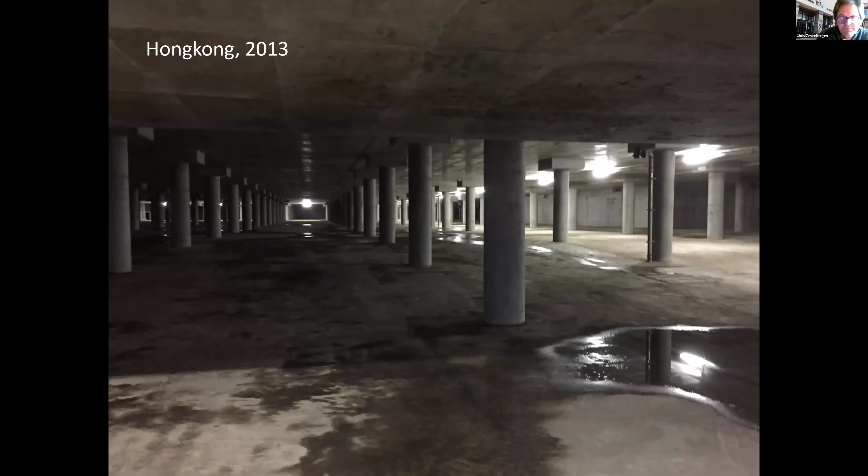In Hong Kong, there are currently large underground water storage systems, as you see here. And on top of those big cellars, you have green areas, parks, and so on. So there's a multifunctional use of space. And these systems are being built currently in many places across Asia.

Another example of how we are dealing with increasing and changing climate is a locally led adaptation program, and we call this tile lifting. It's an initiative which started in one city where the dwellers, the citizens, are being encouraged to remove the tiles in their street, of course in a controlled way.

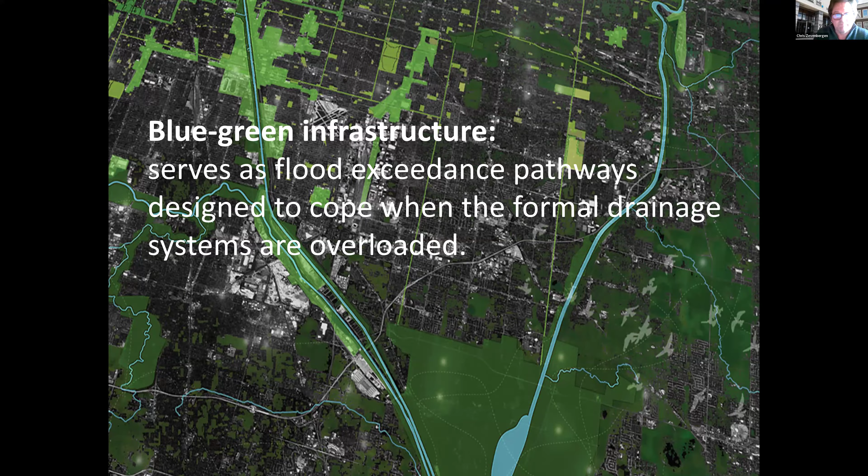It has water bodies around its perimeter, and those water bodies serve on one hand to accommodate severe rainstorms, but also to provide cooling and to provide fresh water in the dry times. So this city has a very, I would say, appealing and integrative view on resilience and water sensitivity.

What we see more and more is that the city alone cannot handle extreme rainstorms, and that cities have to look beyond their borders, have to reach out to the province and even the national level to really align the strategies. And in many cases, floodplains upstream of cities are being considered vital. The management of those floodplains is vital to manage extreme flood events.

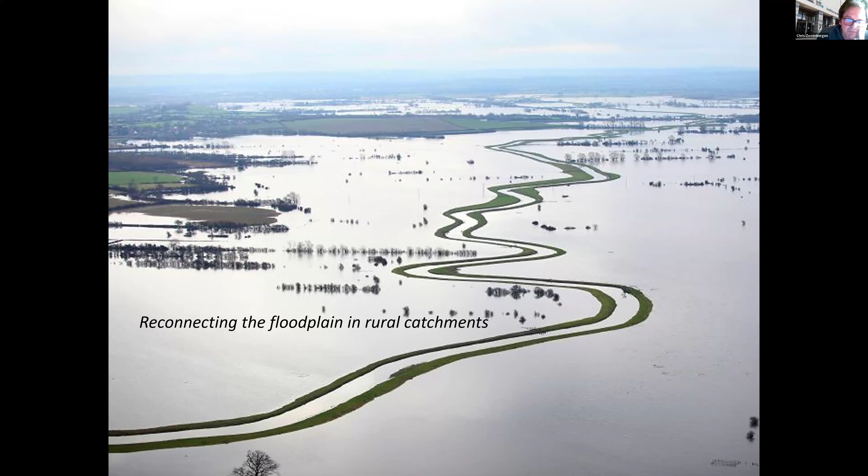There are, of course, lessons to be learned. And if we look from a historical perspective at where we are coming from and how we are dealing with uncertainties in the probability of occurrence of storms and surges, then we started in the beginning just to react after an event, and then based on lessons learned, we were able to prepare ourselves for events.

And in the current situation, we see that our environment is changing and that we have to adapt our systems to those changes. And in particular, it is assumed that those changes are slow and that we can incrementally adjust our systems to changing conditions. So that is a bit the current situation. That is the situation of climate adaptation strategies.

But probably in the future, we need more than that. We have to anticipate trends in extreme events and slow changing drivers. We see that probably incrementally adjusting our cities to a changing environment will not be enough. We have to make what we say a transition, a transformation, because incrementally adjusting alone cannot help us to deal with extreme events in terms of droughts, extreme events in terms of rainfall.

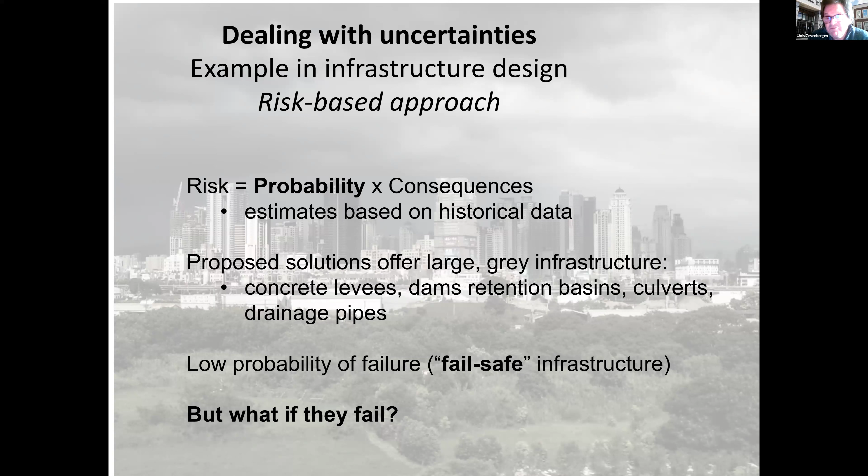And yes, the probability is based on historical data. Based on historical data, we make probability density functions, and we use those functions to make projections. That risk-based approach, we call it a fail-safe infrastructure. The design underlying the risk-based approach is, of course, that we want to have a low probability of failure. That has worked very well so far. The proposed solutions are often gray solutions, such as dams and concrete levees and culverts. But we see now increasingly that those systems can fail, and that we did not take failure into account in the design.

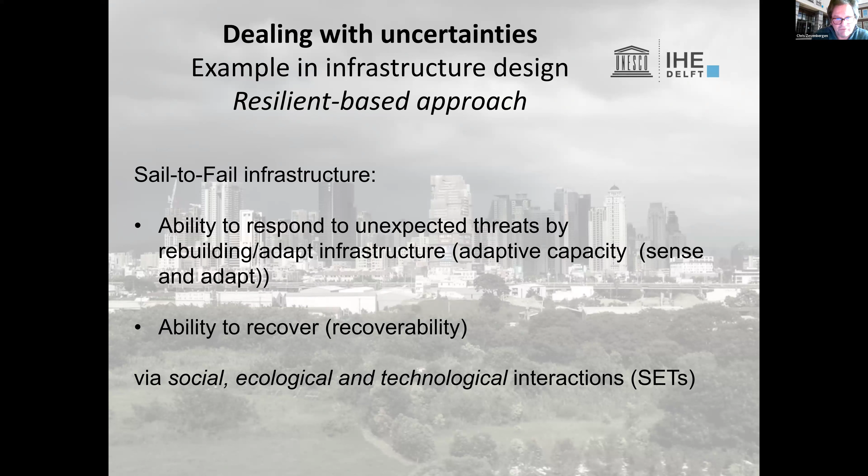A more emergent approach is what we call the resilient-based approach, where we really include failure, we design for failure, and we take into account that failure may occur in the design phase. That is called safe to fail infrastructure. Now, when we compare those two approaches, you can say the risk-based approach is focused on withstanding, providing a threshold, and the resilient-based approach is really taking into consideration that systems may fail, and that bouncing back or recovering should be part of that integrative strategy.

But a resilient-based approach is also more than that. It is also anticipating. It's also taking the temporal dimension into account and looking ahead. And I will come back to that later. But what it really comes down to is that the interventions which fit well into the resilient-based approach are green infrastructure, green hybrid blue infrastructure systems. And they are able to really accommodate those three functions I just mentioned.

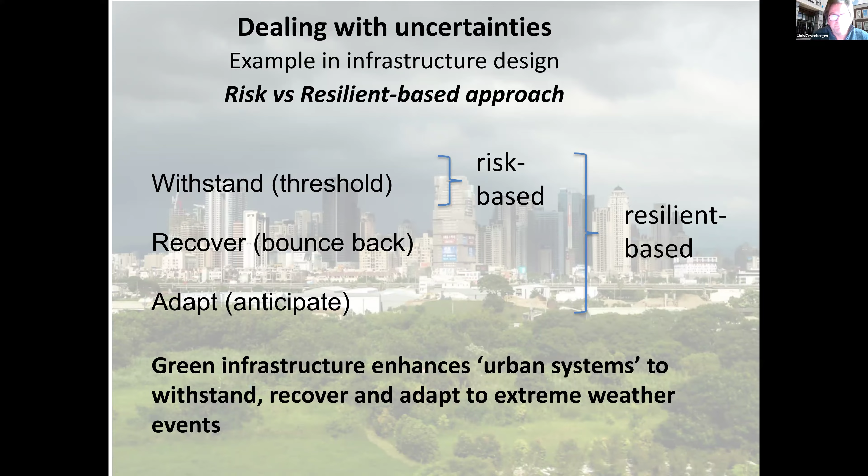Dealing with uncertainties in urban planning and water management is now really a very relevant topic. We are more and more convinced that we have to take a long-term horizon. Our old horizon was maybe one or two decades ahead, but currently we see that we have to look much further than a few decades.

One of the simple reasons is that interventions, in particular gray infrastructure, have long lead times and long lifetimes, and they can span several decades. That means that if we want to plan in a climate resilient way, we have to take that longer term planning into account. But the challenge is, of course, how should we do that?

One strategy is: let's prepare for the worst. Let's take an extreme situation into account and design for exceedance. And the question is, what is the ceiling? What should be that extreme event? Those measures are very expensive, resource intensive, and they always come along with a residual risk. So prepare for the worst is a strategy, but it also has some very serious downsides.

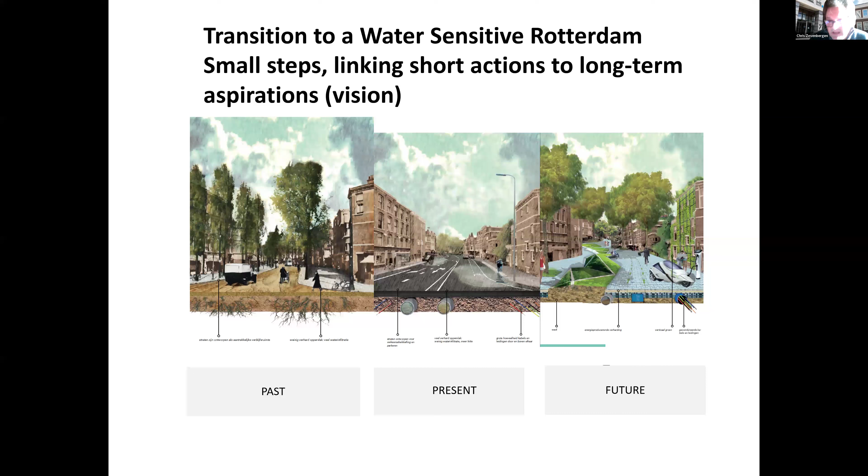So it's an opportunistic approach, and it also means that it takes at least one generation to transform the city from its current gray city to its future regenerative living city. So one of the lessons is it takes time to get there.

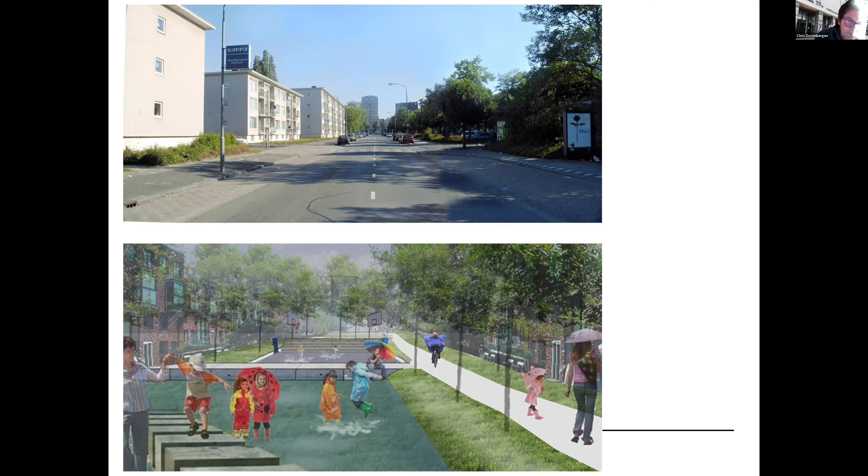They have also envisioned transitions all over the city, and this is an example of the current situation. That's the above picture, and it aims to become a city area as depicted below. So there are many appealing examples of how the city is slowly transforming into a water-sensitive city, and the moments of interventions are being determined by, say, the end of the lifetime of infrastructure or urban developments.

And what is important, the city envisions a long-term appealing future, which is, we can say, beyond the transition. If we really want to make a transition, then we cannot work incrementally from the present situation to the future. We call it forecasting, but we have to envision a future which lies far ahead beyond the transition, and then we have to look back, and via backcasting we can define the pathways to get there. So Rotterdam is really working on generating an appealing vision beyond the transition, and in this case it is 2100.

Another example which I would like to mention is Copenhagen. Copenhagen is one of the very appealing examples in Europe, and it experienced a cloudburst in 2011. There was about 150 millimeters of rainfall in 2 hours, which is really unprecedented. It was a 1 in 1,000 year rainstorm, and the city was absolutely not prepared. So the city formulated a cloudburst action plan, and it comprises 300 projects, 300 actions. And of course, those projects cannot be implemented overnight.

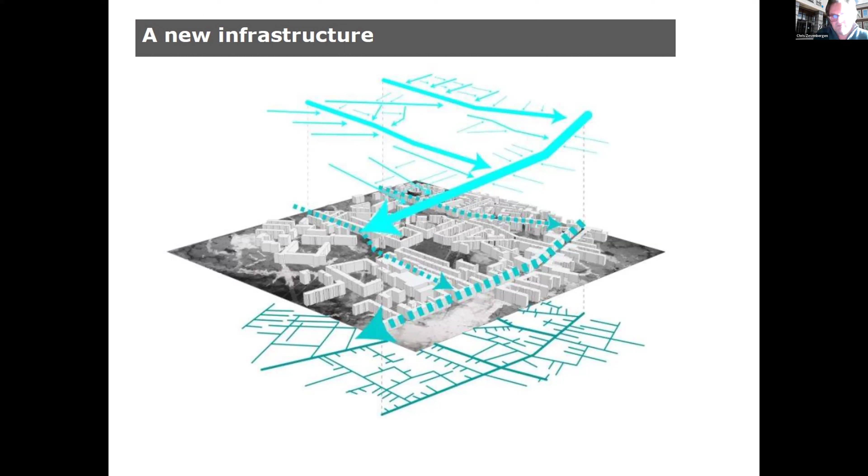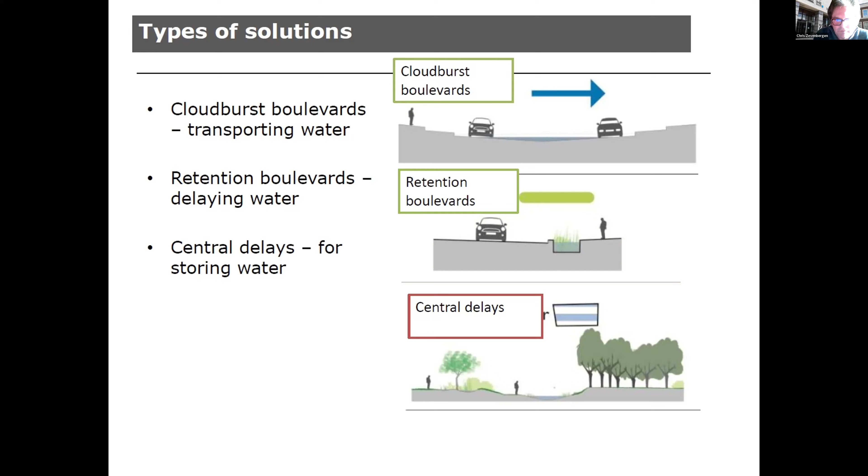So they did quite some extensive modeling. They have a good understanding of how the city is functioning, and they have designed different types of conveyance systems to transport large volumes of stormwater to places where it can do no harm. And you see here a few options. And this is an example from the city of Copenhagen.

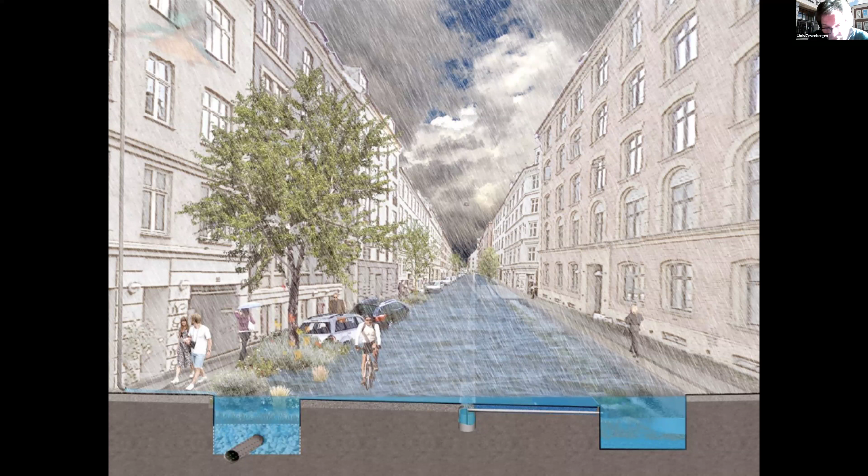Although this is a rendered image, this project is already being implemented, where you see that they have transformed the traditional impervious streets and squares into very nice green spaces. But also, this is a cross-section of a street, and those streets are already being designed and implemented, and they can serve multiple functions, and one function is a floodway when there is a cloudburst.

Now, apart from the two European examples, I would like to briefly mention what's happening in China. China is embracing the Sponge City program. There are 600 cities with more than 1 million citizens, and all those cities are really struggling with too much water during cloudbursts, not being able to deal with those large volumes, but also with serious drought problems.

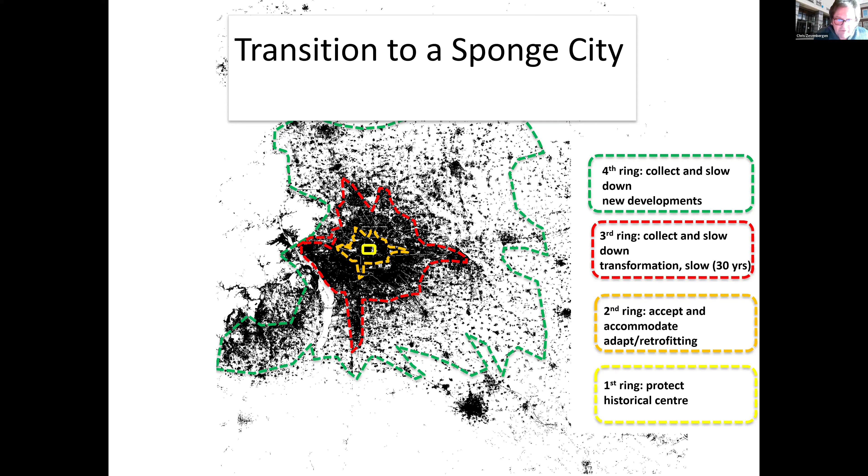So the city is embracing a Sponge City program, and it is maybe nice to see how they are really differentiating the approach according to the zone and according to, you can say, the building typologies we have there. So most cities in China, the old cities, have a historical center. They have a ring which has been developed, say, in the 80s and 90s, and there is a third ring where new developments are taking place. So let's have a look at what the strategy is for those cities.

In the ring which has been developed in the 80s and 90s, the philosophy is to try to expand the retention capacity and try to slow down and absorb rainfall as much as possible. And you see here an example on the right upper picture. You see the old situation where we have a combined sewage system where the sewage and rainwater is combined and conveyed through an underground pipe to a sewage plant. And now on a big scale, in this particular case of Kunshan, a city in China, they are opening up the infrastructure, and they are separating rainwater conveyance from the sewage, as you see with the black tubings on the left-hand side.

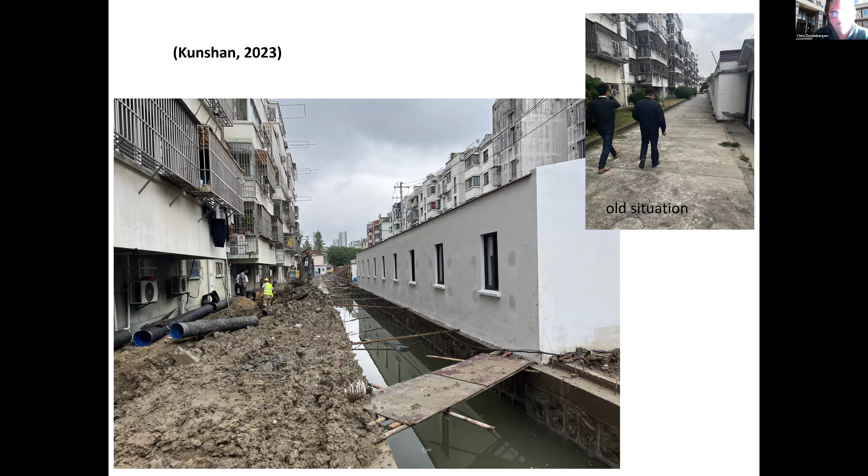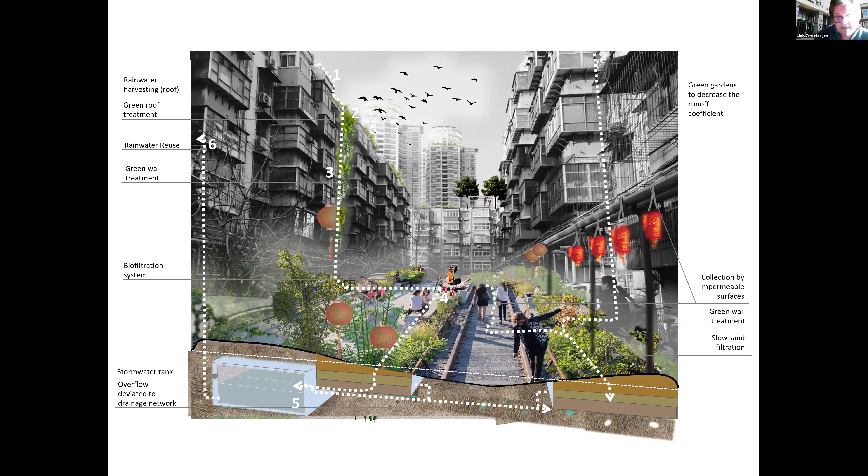So they open up the system, and they are creating very nice open water systems in the city. And this is an example where that has been done in Kunshan, where the rainwater is now being collected in those parks along city areas, and where we have at the same time a lot of opportunities for recreation. Now, this is being implemented on a massive scale, but also cities are now preparing to transform like this, and in a way we see also in Europe multifunctional use, particularly of infrastructure, to address the issues of too much and too little water.

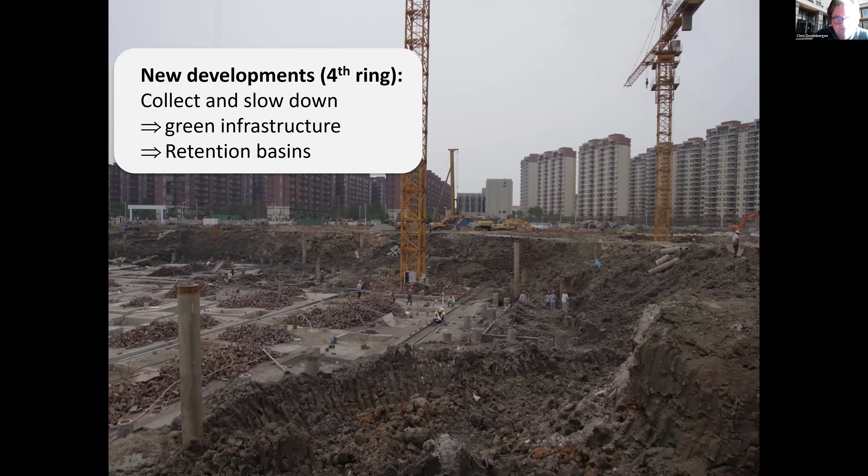And the new developments which are now underway, of course, have to comply with the current Smart City standards and Smart City requirements. And these cities largely consist of high-rise buildings with a lot of green space in between. And I would say that these areas are really transforming very rapidly and are built as smart cities. And the challenge is particularly not in this ring; the constraining factor is in the third ring of those cities.

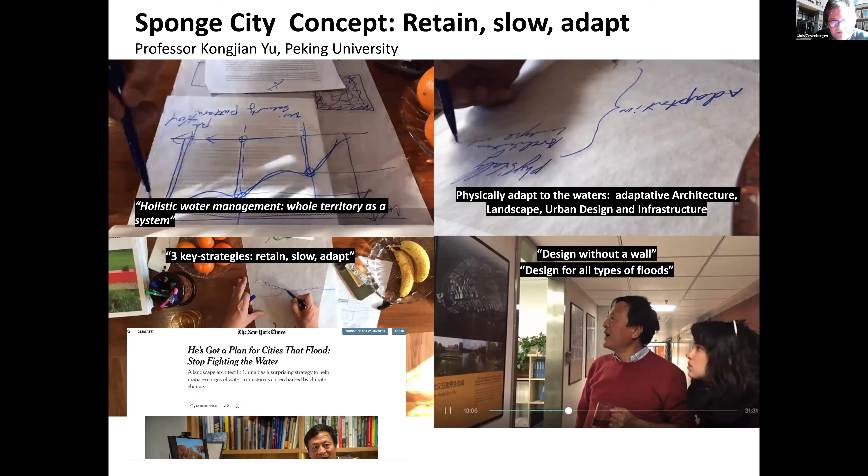Now, one of the leading experts in this field is Professor Yu, and Professor Yu is really working across China on many cities and is preparing plans and master plans for many cities. He is really envisioning a city where green and blue-green infrastructure are very dominant, and where we really have a long-term perspective and try to really absorb the extreme events using blue-green infrastructure. Now, this is not new. This is happening across Europe and across the US. But what is, I think, new is the scale on which this is happening.

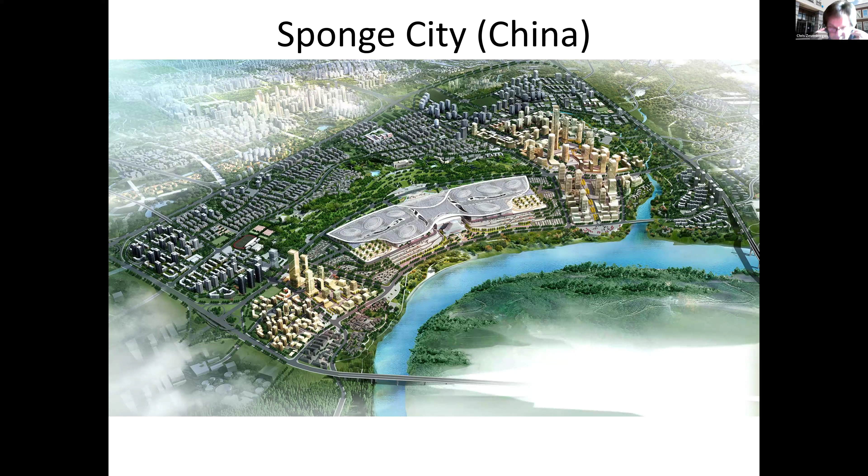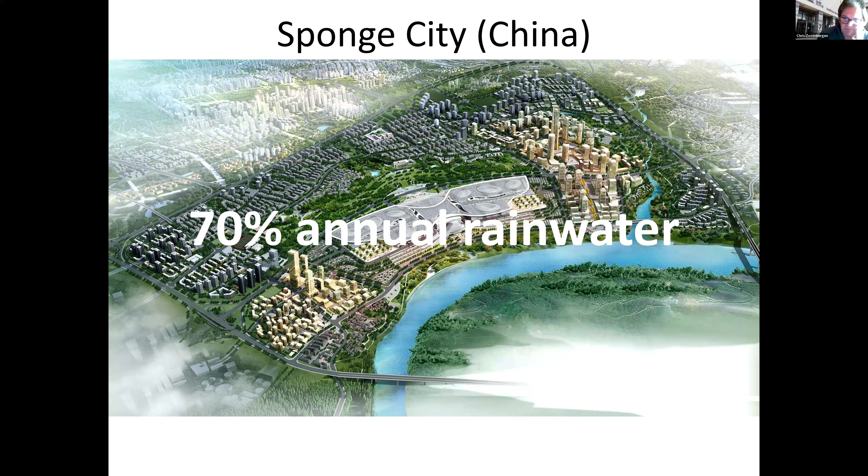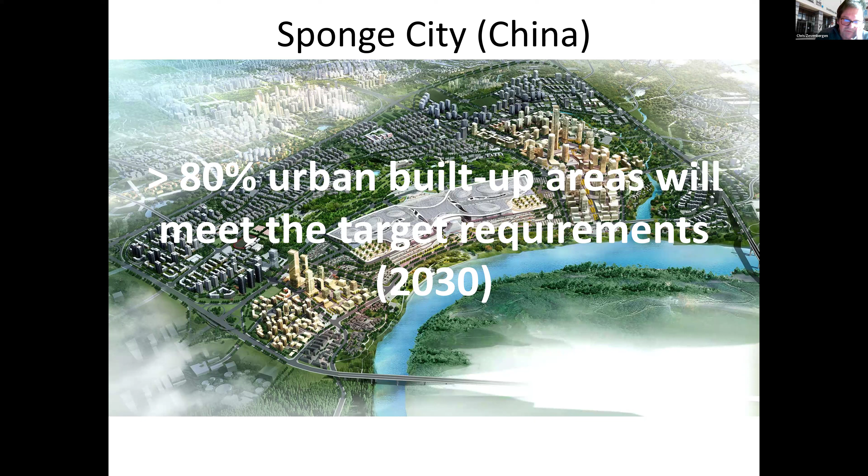And this requires, on the one hand, to imagine an appealing future of a city, and that should be a collective imagination. But it also requires policies in place to make this happen. Now, the target is that 70% of the annual rainwater should be captured, and 80% of the urban areas need to meet those targets across China by 2030. So you can imagine what a huge challenge China has to transform cities in this space to really smart cities.

Now, the question is, what do we learn from these examples? I think the first lesson is that we have to have that long vision to also really provide guidance to the steps taken in the short term. So small steps, locally led adaptation, should really be embedded in and guided by a long-term vision. And the problem is, what we see now is that on the one hand, we have a lot of initiatives in cities, locally led adaptation initiatives.

They are bottom up, like the tile lifting. They have a very short time horizon. It's a very local level, and they are appealing because they are demonstrating to the citizens how it is working. So that is a process, a trajectory, that works well, but it cannot be considered in isolation. It should be part of a grand design or an envisioning of a future. And that can only be done on a larger scale, on a catchment scale, national scale, or a city scale.

And that requires imagination and evidence. And what we see at our universities is that our landscape architects are really stimulated to use their imagination skills, and we allow them to think outside the box. But in our engineering disciplines, and a lot of other disciplines, we are not really encouraging them to embrace imagination as a requirement to come up with an appealing future which is beyond that transition.

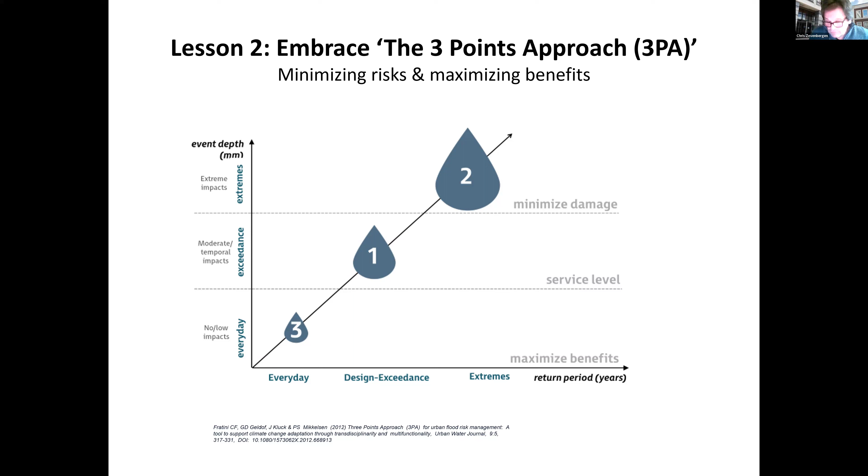So it means that designers and architects and city planners have to embrace the three domains in an integrated manner, looking into the standards, looking into exceedance, but also looking into the multiple benefits. And this has been depicted, for instance, by our friends in Copenhagen in this way. And you can see that in those three domains, there are very typical objectives.

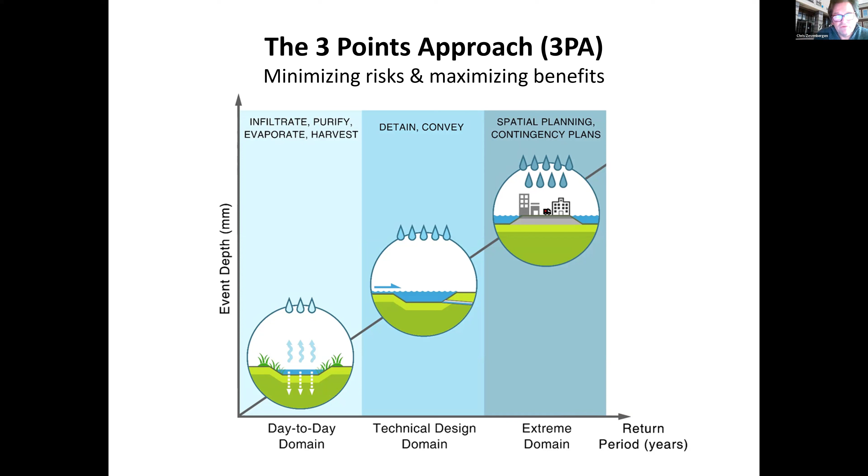In the day-to-day domain, the main objective is retaining water, allowing water to infiltrate as much as possible. Also, purification is there. So nature-based solutions are the interventions which sit here. And then we have the domain to detain or convey, which is the traditional or technical domain. And then we have the domain of spatial planning and contingency plans, which is about the extreme domain. So that is, in a nutshell, what we can learn when we look at those appealing examples, how those strategies are being built and developed.

That also means when we look into the measures and interventions, where they sit, we can say that green infrastructure is really covering domains 3 and 1, and could also be expanded a bit to domain 2, as you have seen in Copenhagen and in China, where floodways are being constructed using green infrastructure as well. And we see that gray infrastructure is very much confined to the first domain, and hybrid structures are more and more embraced to cover the three. So that is what we can learn from those examples.

And concerning the hybrid structures, I would like to mention the Philadelphia water project, the Green Stormwater Infrastructure Project, the transformation which has been undergone in Philadelphia, where on a massive scale the sewage and stormwater is being separated, and where extra capacity is created by using above-ground green-gray solutions to really accommodate increasing volumes of water.

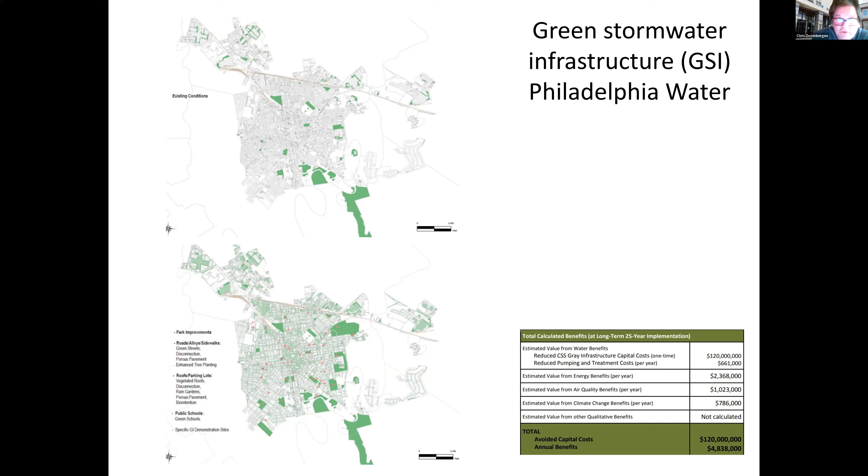So I will now come to some concluding remarks.

In the first place, I think we are moving to a new era, an era where adaptive planning and incremental adjustments are no longer valid. We have to really make plans, take important decisions and look ahead.

So planned adaptation means that we can no longer postpone big decisions, but that we have to take big decisions, which need to be planned and which maybe go beyond the transition. So the shift from adaptive planning and incremental adjustments to really transformative planning or transformative delta management of urban water management is probably the way to go forward. Now, design and a design-based approach can play a very important role in shaping those plans.

Then regarding the design principles, it is no longer efficiency which is important, because efficiency assumes that you can really estimate the costs and benefits of an intervention very well. And we now know that there are large uncertainties surrounding those, and that the target should be how to maximize the value instead of supposing that we know the efficiency of the system.